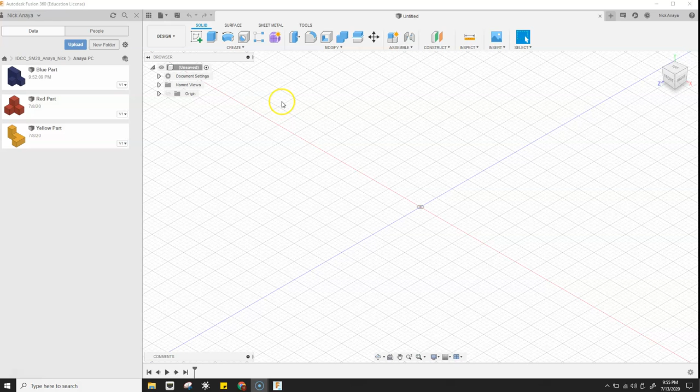Now we're going to go ahead and make a model of the green part. In this case, we can start a new sketch, click on this face. Then we're going to take our line tool, starting at the origin, go up.

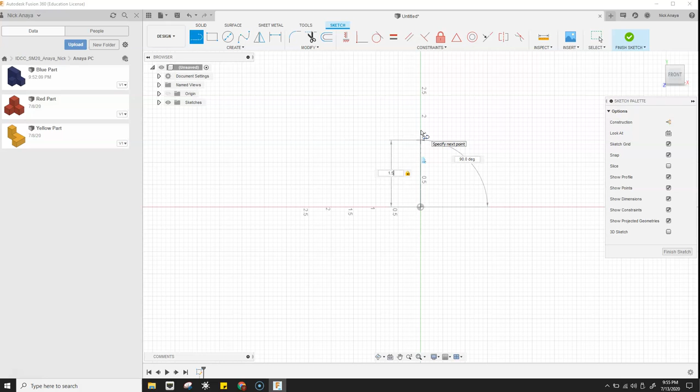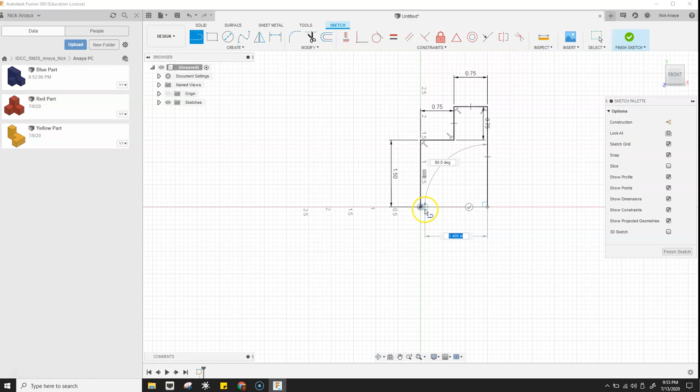1.5, then click to the right 0.75, and click up 0.75, and click to the right 0.75, and click down to the axis, click, and back to the origin, click.

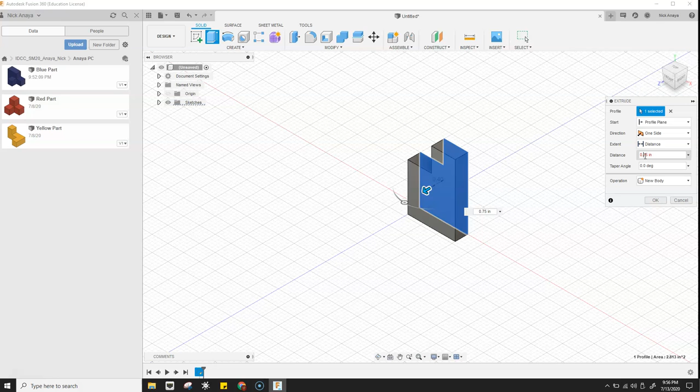Finish sketch, E for extrude, grab the arrow, begin to pull, set the value to 0.75, hit enter.

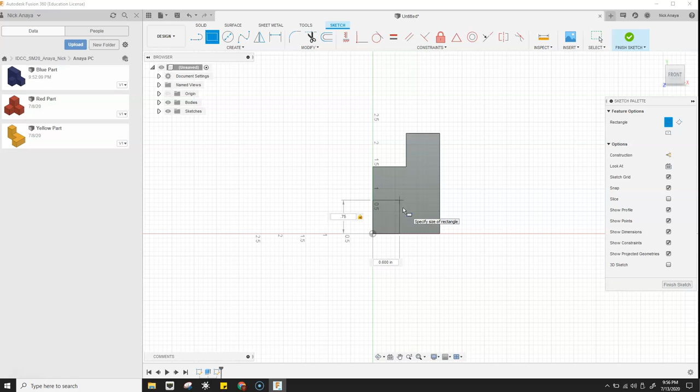Then right click, sketch, 2-point rectangle, start at the origin, move up and to the right, 0.75, tab, 0.75, enter, finish sketch, extrude, click, pull, 0.75, enter.

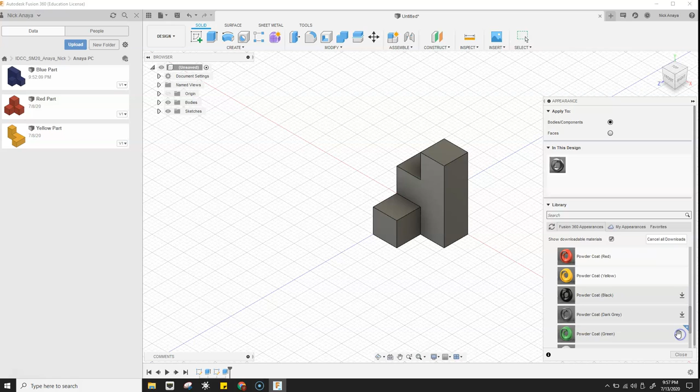Go to modify, align—no, not align, appearance. Then this one is going to be green. We download the green, then we'll go ahead and drop it on. Hit save. Green part.

And that's the green piece.